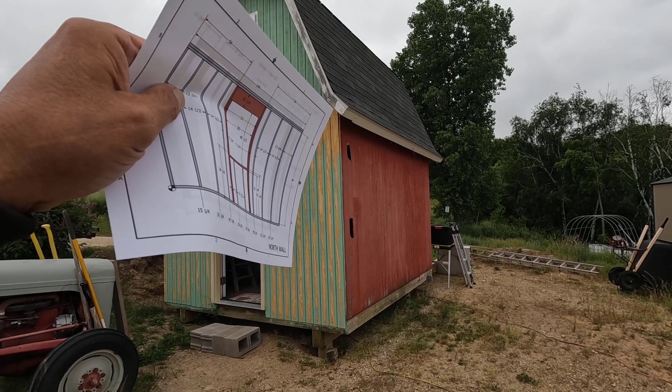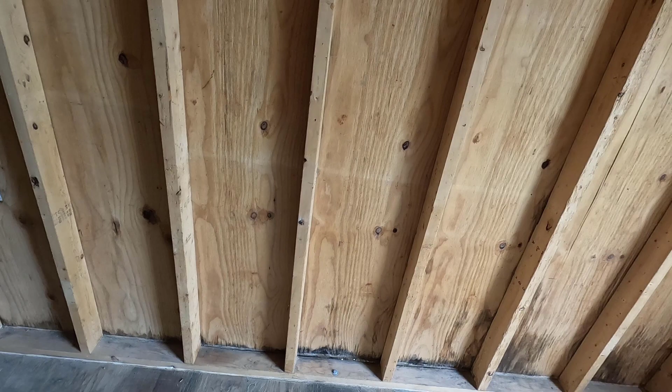Today we're going to start work on the north wall. Still nice and clean in here. I cleaned this up, that was probably a week ago. I've been doing all kinds of work over in the restoration project over there, and it's been really hot.

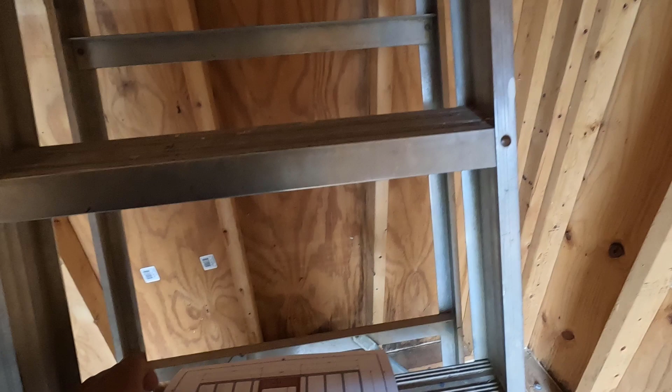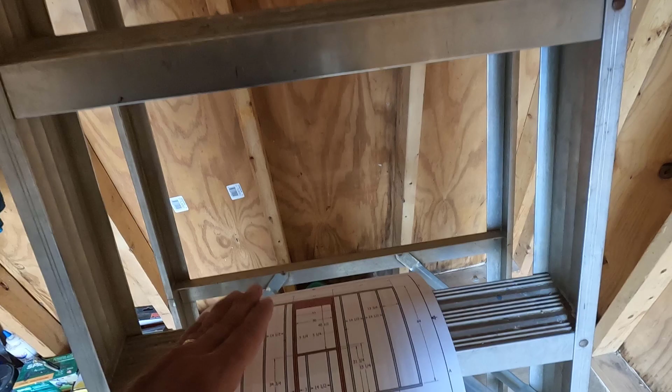Today I have a coat on. It was 50 degrees overnight. It's going to be 45 degrees tonight. Kind of chilly out, but perfect weather to be working on this.

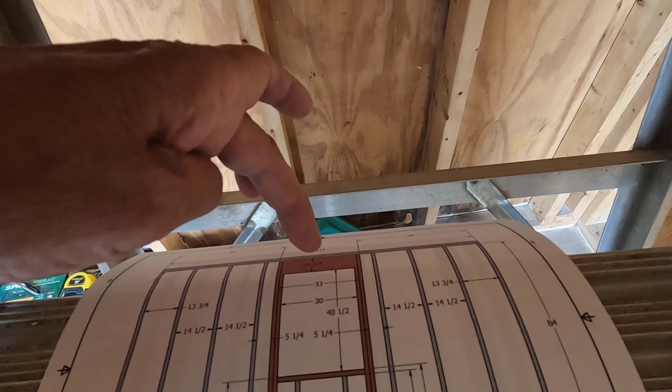Okay, on this wall, the only thing that changes is the two center studs. These two get cut off at the window height, right at that sill height there, and we're going to add 4 studs and a header. So first thing to do is to make those cuts at the top and get these panels off.

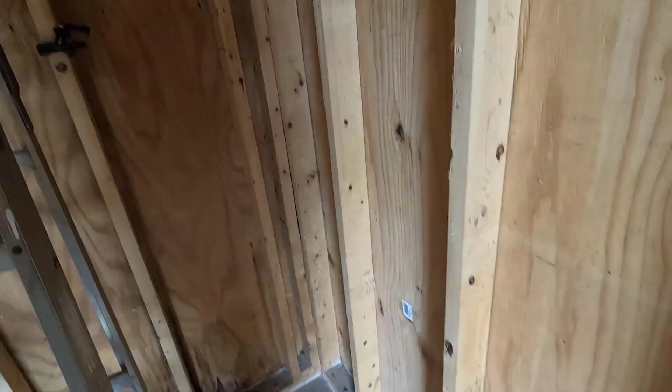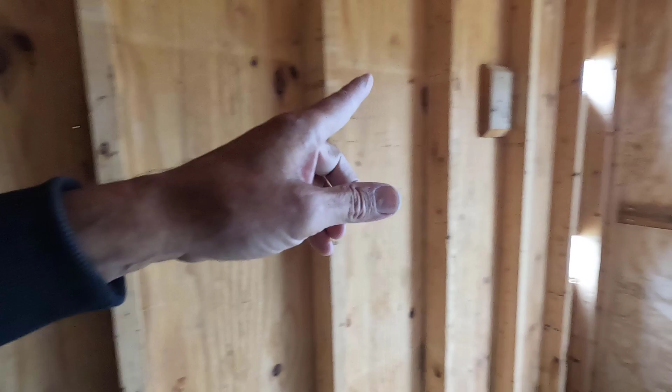It might be easier if I take the Sawzall and just cut right down the middle of the panels. I'm not sure. On this other wall, I just took the entire panels off. Yeah, I don't know. Let's get this cut done and we'll figure that out afterwards. Oh, I need to go on the outside and see which way these lap, whether I should start on that end or this end. But for right now, all we got to do is get this cut done.

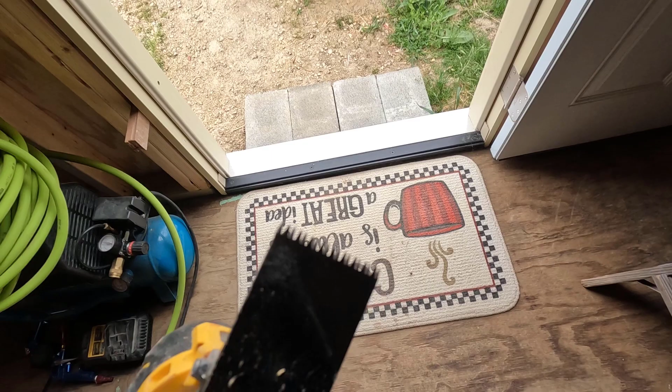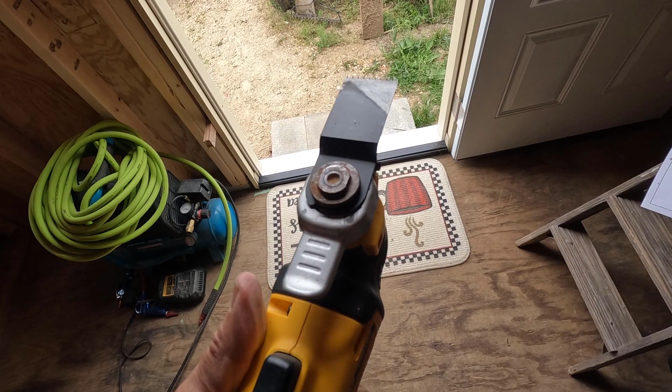All right. I believe, yeah, that looks like an aggressive wood blade. What does it say? Wood and plastics. Got some fairly aggressive teeth on there, and this is pretty new. I think I put it on when I was finishing up cutting out the doorway there, so I guess we'll just use this and get moving on this.

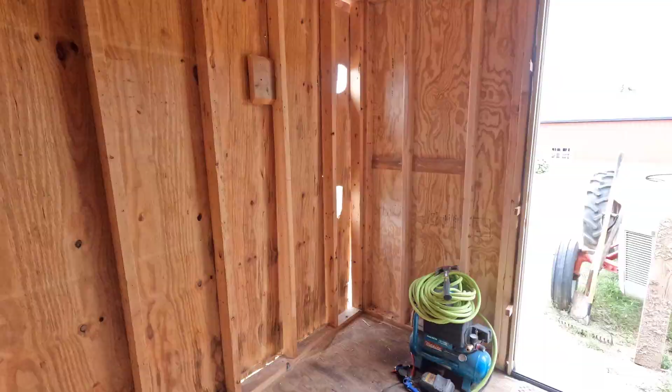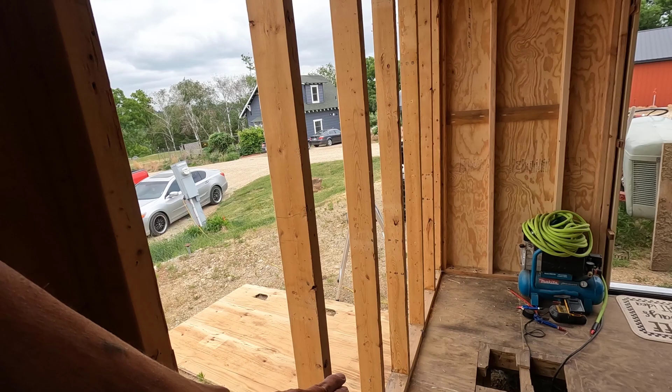Okay, I got off what I needed to get off. Now I got to cut these 2 studs at the correct height. I got to try to stay over here in the corner. We've got a pretty strong wind and it's coming in gusts. Hopefully I can get over there. Yeah, right now. I got to go see if I have a 2x10 laying around. I should, but I don't know for sure.

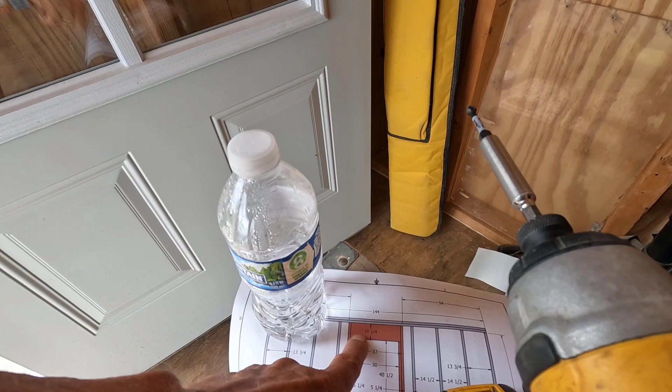I need 2 pieces of 2x10 by 33 inches and a piece of OSB that same size. Then I need these 4 studs and a sill. Okay, I should probably get all this stuff. This is the big thing right here. I'll have to cut that oversize and then trim it to length and some other stuff. Hopefully this wind isn't messing things up. Alright, let me go see if I can find all this stuff and then I'll get back with you in just a minute.

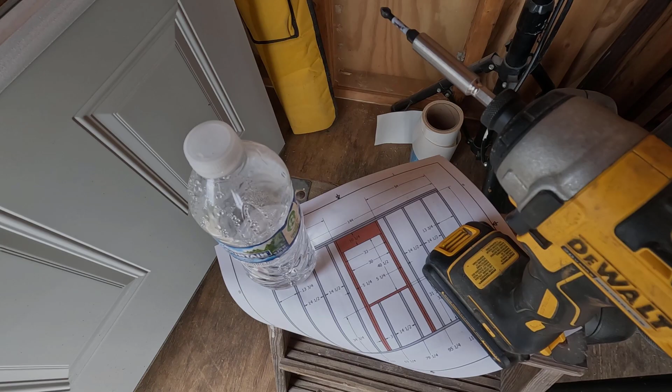Okay, I have all my wood cut. I have a header, 2 king studs, 2 jack studs, and a sill. And that is these pieces right here. It's very windy. I'm in this corner hiding from the wind, and I had to close the door as well because it was coming through here.

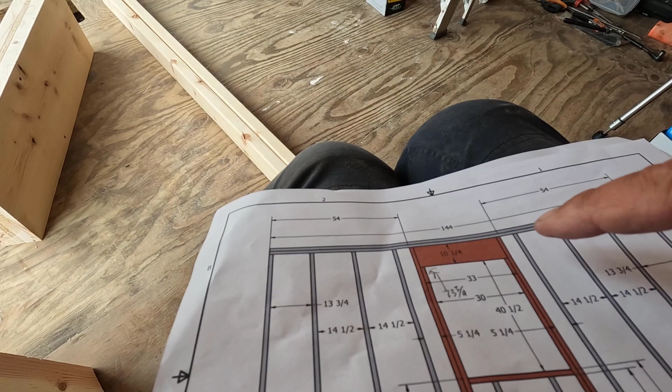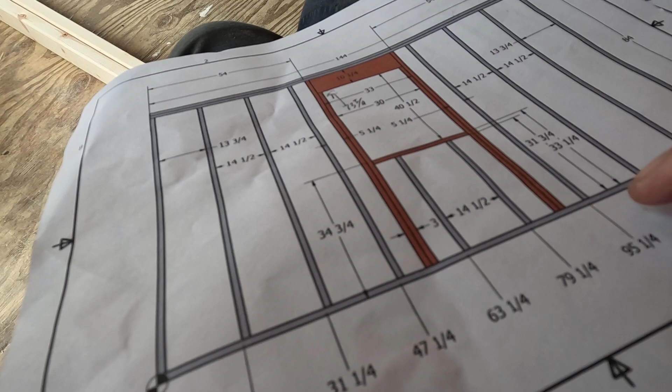So I got to figure out where I'm going to pocket screw this and where it's going to just get nailed. I can't get the nailer in here, so I'm going to have to pocket screw here and on the face of the header. And where else? Yeah, that's unfortunate. I can't get at either side down here, so I'm going to have to get that pocket screwed as well. I'll just put 2 pocket screws on each side of these.

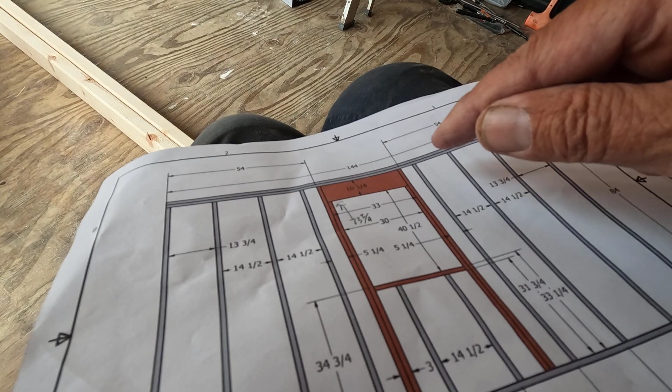I think that's it. And then what I'll do is assemble these in 2 separate assemblies. The king studs and the header, I'll nail that together and throw a couple screws in there for good measure. And then the jack studs and the sill. And yeah, I don't think I'm going to pre-assemble this whole thing. It's going to be kind of interesting because I'm just cutting these off to length.

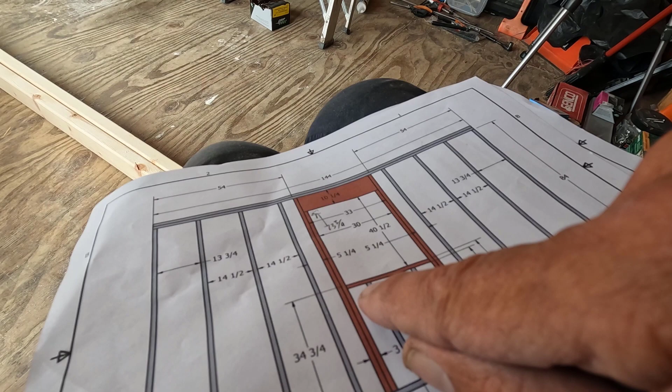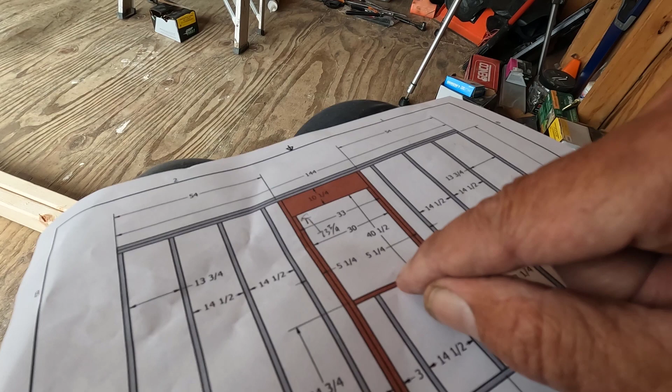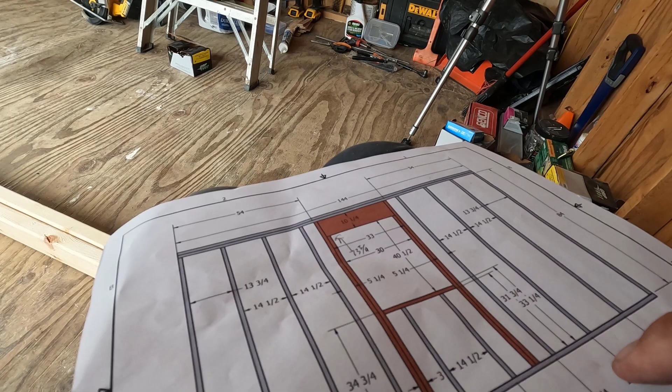Maybe I'll just pocket screw this sill in after I get the thing assembled. So I'll just do one assembly with the jack and king stud and the header and leave this for later. The sill actually holds no weight. The window is nailed through its nailing flange, through the siding and into the studs here, and that's what holds it up. Okay, so what do we got here? These got to be cut off at 31 3/4, and I have some pocket holes to drill.

All right, oh, and should probably tell you, the header, if you've never done one of these before, that is 10 1/4 inches wide, and it starts out as a 2x12, which is 11 1/4 inches wide. So you cut your pieces a bit long. I cut them at 36 and trimmed it down to 33, and then the center piece is just cut a little bit smaller than what it needs to be, and then everything is screwed together really well, making sure that the screws are out of the way of where you're going to cut.

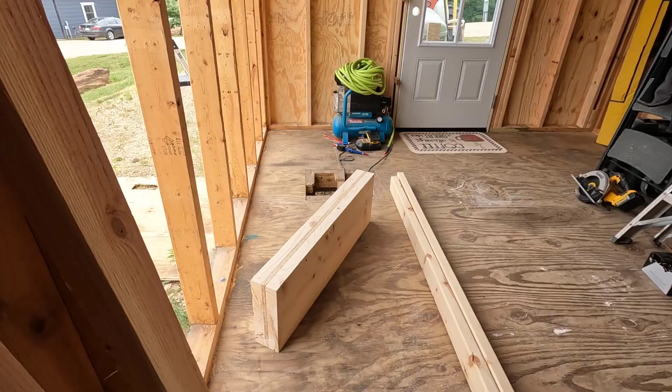And then once you get it all screwed together, trim one side, turn it over, cut it to width, and then cut it to length. And bada bing, bada boom, you got a header. But you got to make sure that you're using 1/2 inch OSB or plywood and not 7/16. Otherwise, your header is going to be too thin. Okay, let's start getting this thing laid out and assembled.

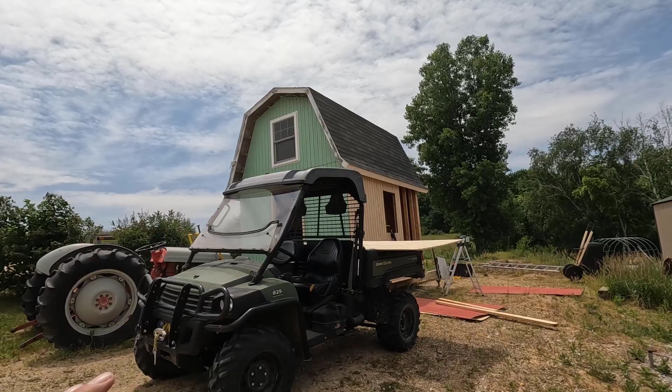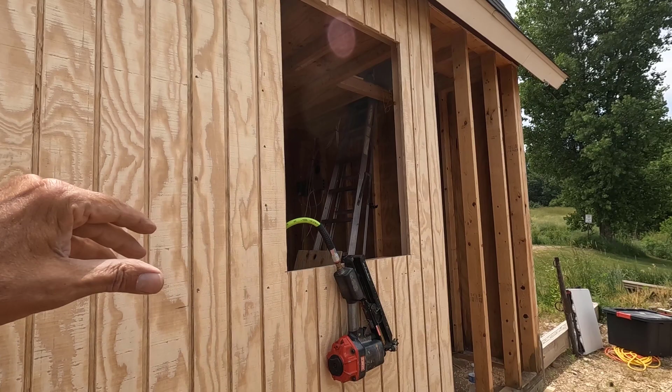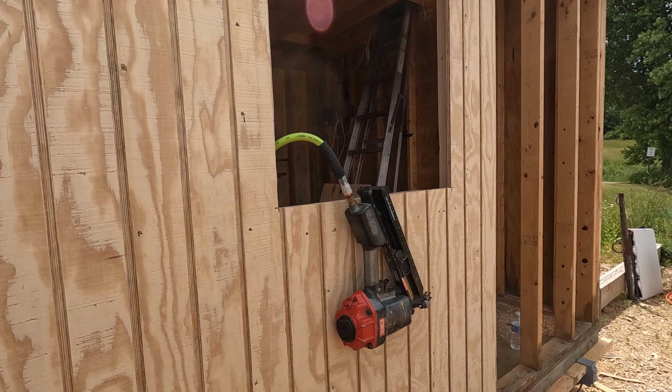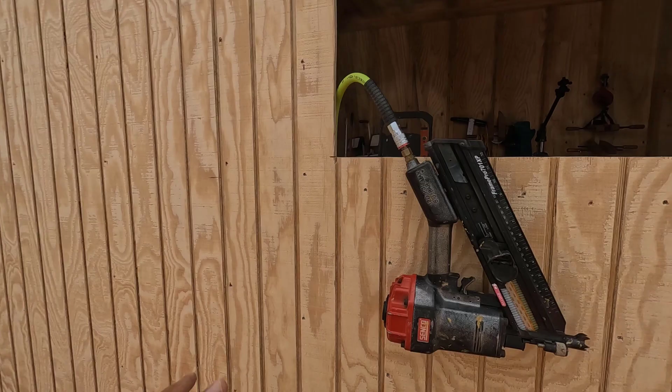Okay, here's what happened. I started this side 2 days ago, and I was feeling pretty poorly the first day. I can't even remember how far I got on this the first day, but I actually got fairly far. And then yesterday, I believe we just pulled nails, and I finally got this stuff on towards the end of the day. I was going to bring my camera, but I forgot it in the house, and I just never went and got it again. And kind of the same thing happened today. I came out here, I thought, well, I'll go get my camera when I go to cut that panel, and I didn't. So now I got the camera, I got my cleats in place.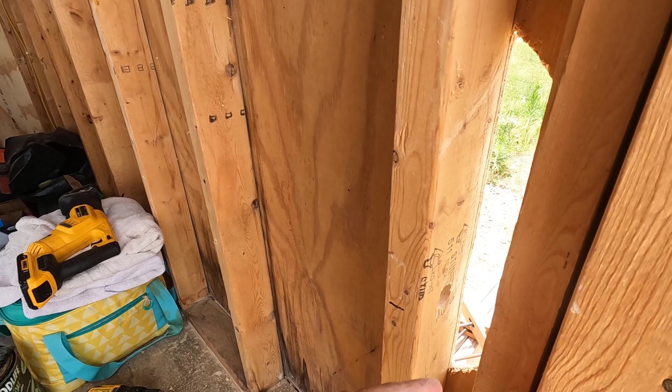Oh, I painted this with the Copper Life during this time. I got these notches cut for clamps. I got these holes drilled because this is a really tight corner, and there's going to be stuff right in here too for attaching the addition. So if I didn't get this drilled now, it would never get drilled. So got my wiring chases drilled, got everything ready to go.

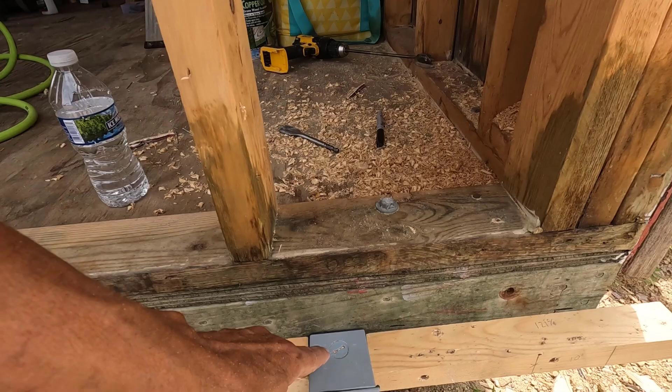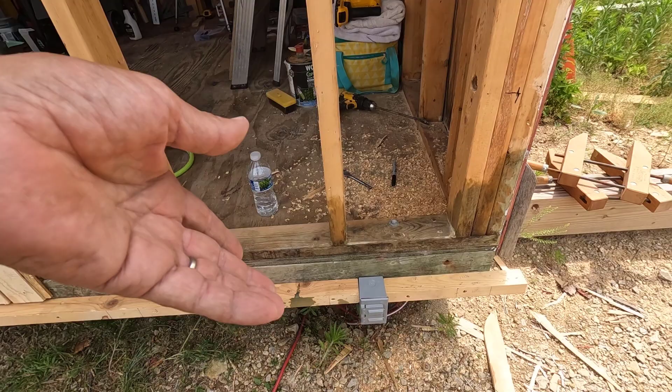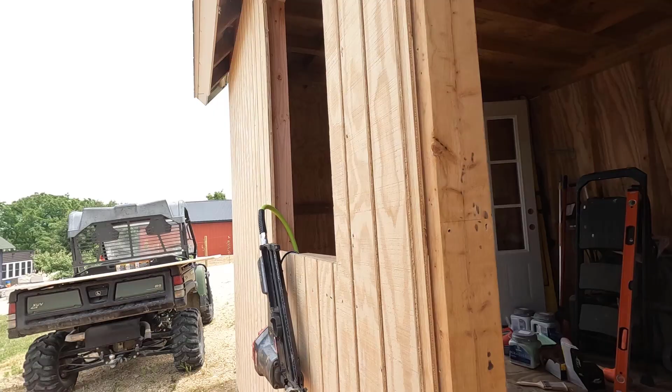The only possible problem with this last panel, well, there could be all kinds of problems, but the only one I foresee is this box might be a little bit too high. That's just a temporary box anyway, but I hope it's not too high because I got to turn off the electricity and pull it off of there and lower it and all that stuff, and I'd rather not do that. But other than that, everything is ready to go. I'm gonna grab the panel, get it in place, clamp it, and we'll see if we can get this nailed in real quick. Okay, before I forget to film again, let me show you what I'm doing.

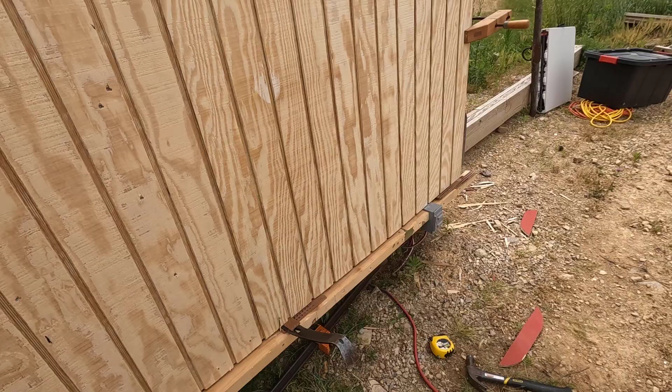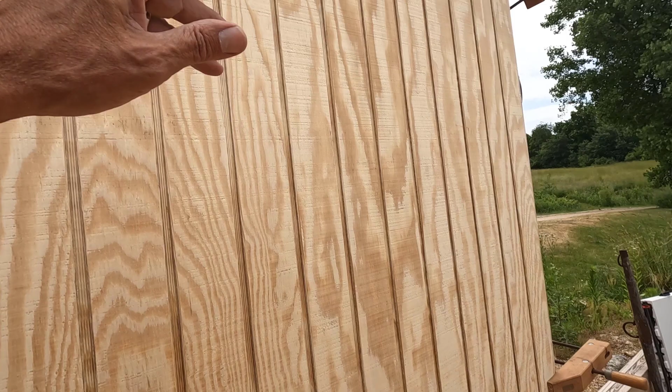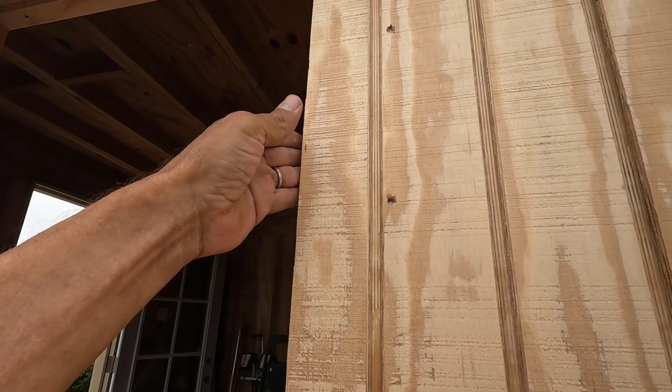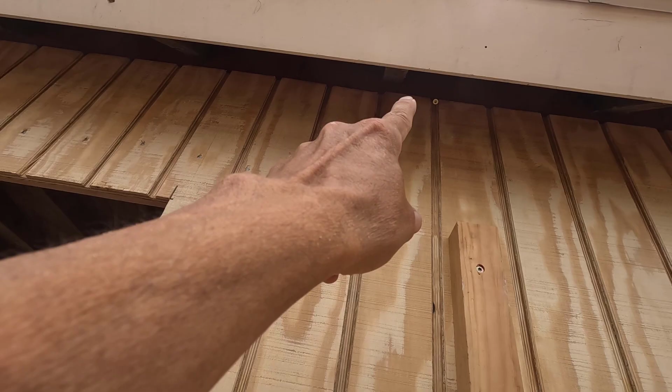Got the cleat on. The cleat is roughly a 1/2 inch too low, and then you shim it until it's into place. You got to do that because that cut does not go all the way to the top, so you got to shim it up against where that cut is. Kind of hard to explain, but that is what you got to do. And then in order to get this seam 100% correct, I needed to screw this cleat on here and then clamp it over to the window. And once I did that, I put enough shims on that side and clamped it over there, and now it stays. Also put these in because the panel wants to pop out. Got one up there and one down there, and it's all ready to go. So I'm gonna get this nailed in, and then we'll figure out what else we got to do today as soon as I'm done with that.

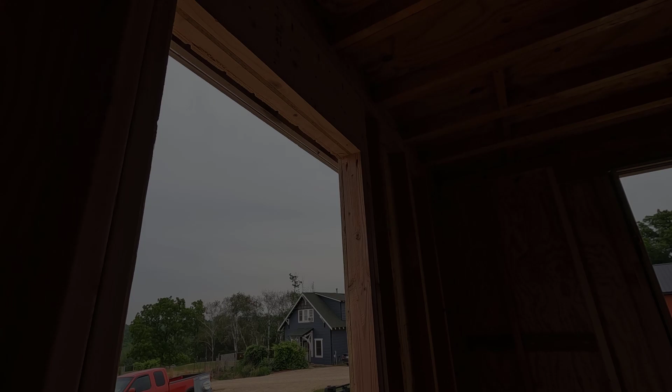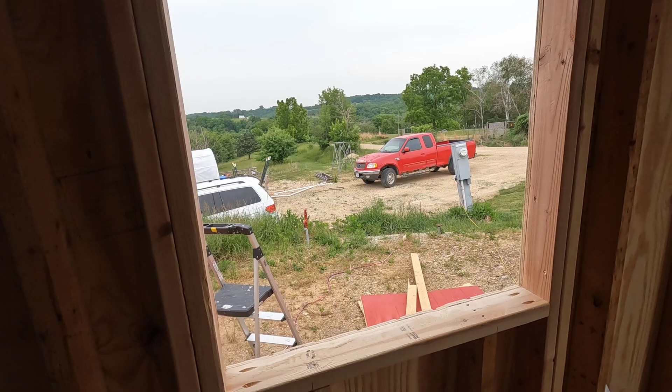Okay, that's gonna have to be it for today. It's already nearly 5 o'clock and I am exhausted again. I think I've been sick for like the last week. I've been working the whole week, but I just get exhausted real easy.

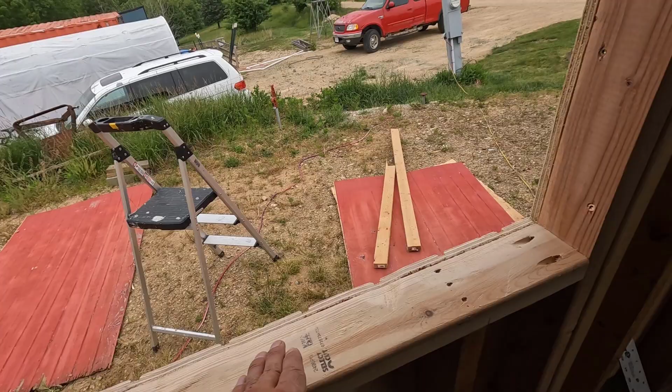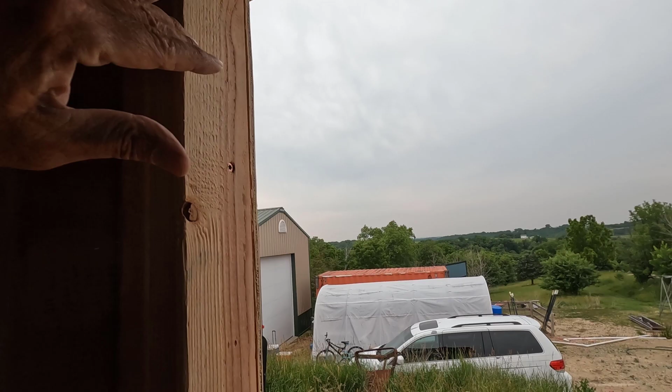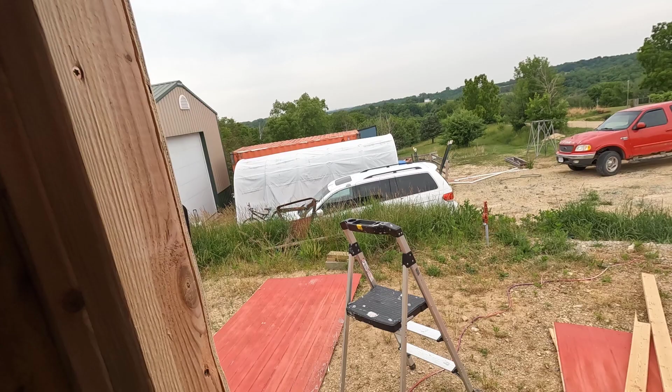I sanded the opening, and the way I cut it, there's a little bevel on the outside here. Once this window is painted, I think we're gonna go maybe 3 inches around the window. I'll put in my window wrap. I think I got Protecto Wrap, but it really doesn't matter what brand it is. What you do is put it on the bottom going up, and then you put a piece from here all the way to the top. Same on that side. And then you put a piece on the top that laps down onto this side. And that'll catch any leaks, but for the most part, what it's doing is catching condensation. If you got condensation on the outside of the window, it doesn't allow it to just go right into your wood and rot your wood. The condensation will evaporate before it does that. All right, I'll show you more of that when we get to it.

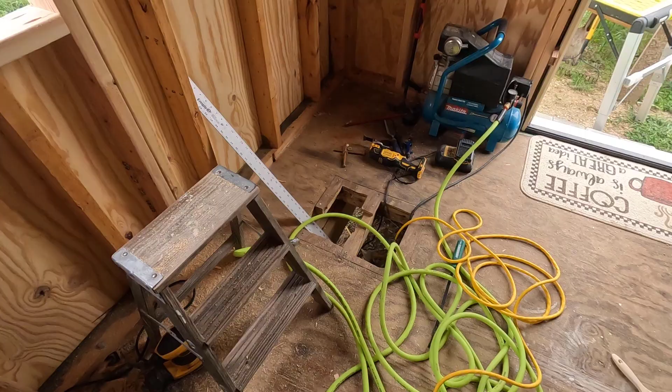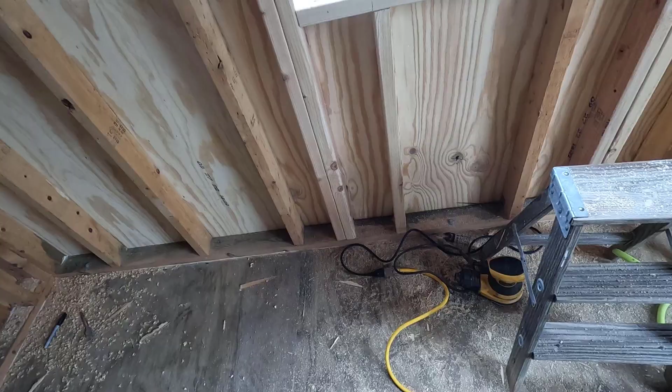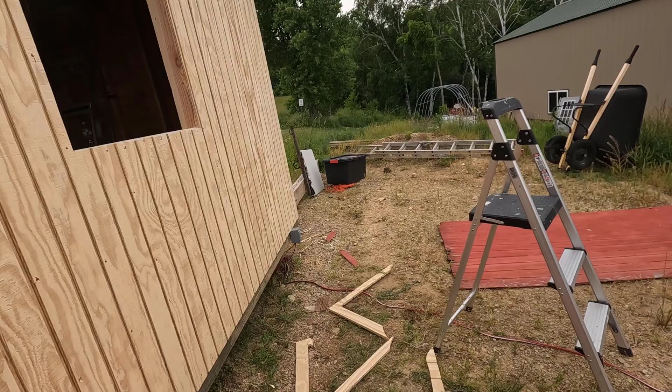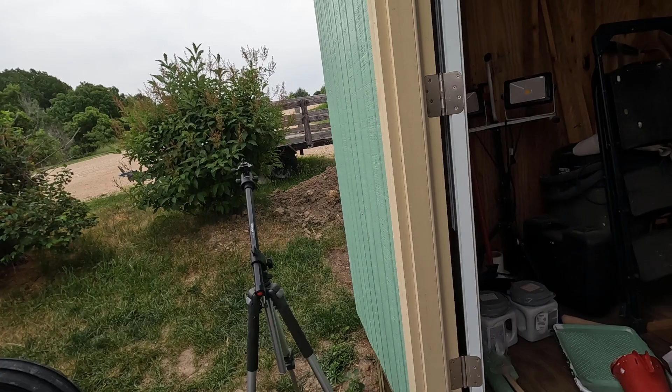Like I said, maybe I didn't say, I was gonna clean up, but I am just pooped. I think I'm just gonna call it quits right where we're at and clean all this stuff up tomorrow. Yeah, maybe Natalie can get at it and get this opening painted tonight and then do another coat. Oh, that's right, tomorrow I'm heading to town. Tomorrow's actually going to be really hot, so it's a good day for it. So I won't be making a video tomorrow, but I will be the day after that. So the next video should be me putting this window in. I hope so, because once the window's in, we can put an air conditioner in it and have a little bit of coolness in here.

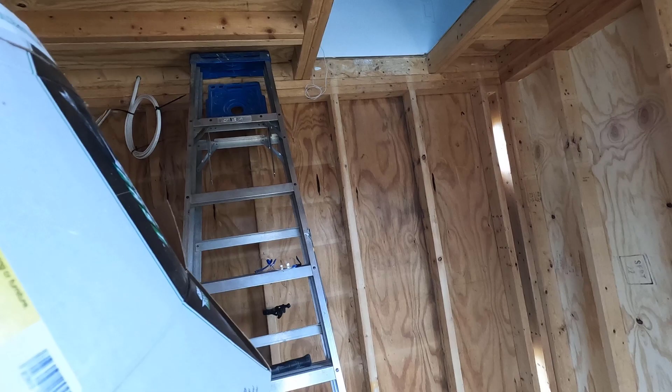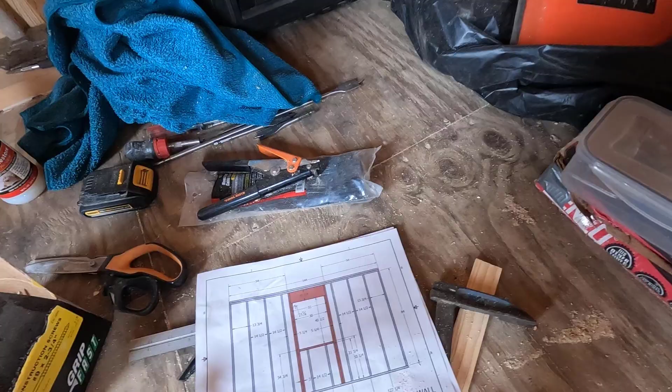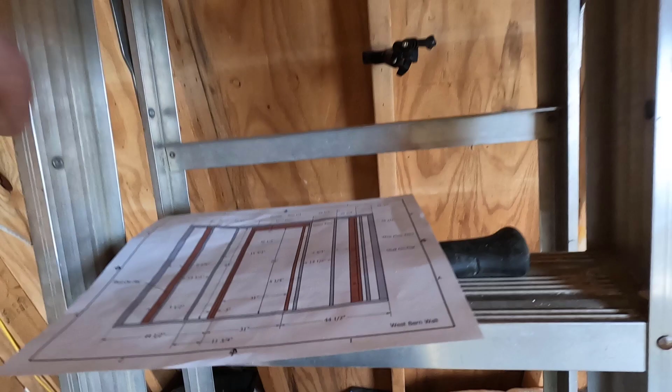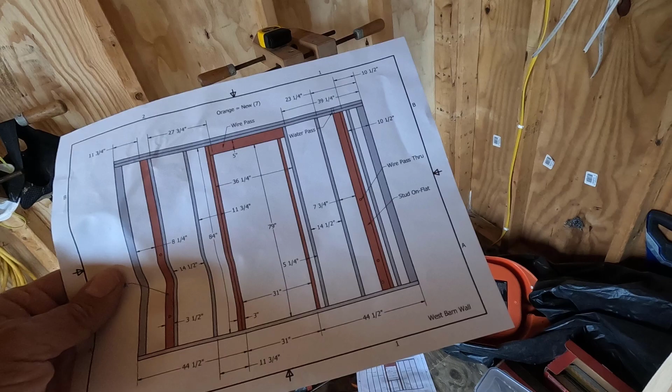All that's left on this lower floor, I have some cleaning to do at the tops of these walls because of the way we had to cut the walls out. And I have this back wall to do. That has mounting points for the addition that's going that way. So I think I got a drawing of that right here. The old drawing, I have a new one, but this pretty much shows it. Right here and right here are the mounts for the next building. The framing is going to be screwed or bolted right through those. And then we have a doorway going right here. All this brownish stuff is the new studs. It's actually going to look a little bit different than that, but that's basically it. All right. So like I said, next video here will likely be me cleaning up and putting the window in. That should be easy for one day.